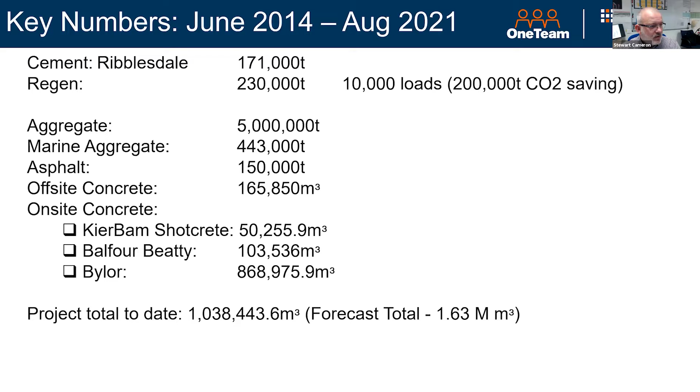Just a little bit of detail on the contractors: Bylor is the main civils construction - they're by far the largest contractor on the project. Kier-BAM is a JV responsible for the site earthworks and infrastructure, and they also constructed the sea defence wall. They're still on site doing multiple little things around site.

There's over 48 warehouses to be built - they're doing some, not all. They're still doing a lot of roads. The permanent infrastructure - I don't think we've actually started any of that yet, so we've got a long way to go with that.

And then Balfour Beatty on their own are doing the marine package. Originally that was Costain's, and unfortunately, for reasons not known to me, Costain's couldn't reach a commercial agreement to finish it, so Balfour Beatty came in and took over. But it's not restricted to that - so far there's been 40 other smaller contractors working on the project, doing different aspects and elements, and I'm sure that will continue to evolve as the project goes on.

So on any given day, we typically have around 15 to 16 different customers that we're delivering to.

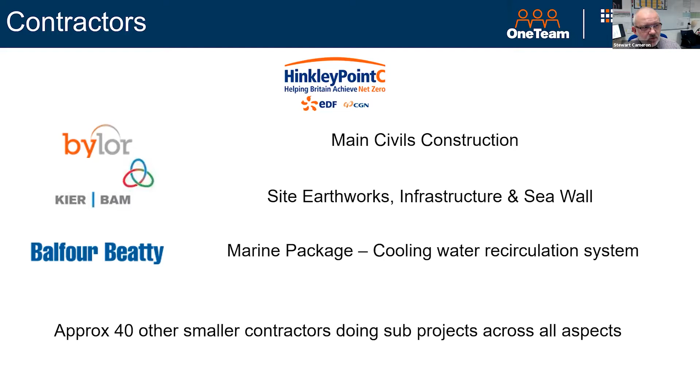Focused on what's left to go. So as I said, just shy of approximately 700,000 cubic, with a current end construction date of May 27.

That doesn't detract from the planned energization of reactor 1, but remember there's 2 reactors here, so reactor 1 will be finished running and powering the grid when we're still finishing elements of the project on site. I've been asked to make sure when I highlight May 27, everybody realizes that's not moving the energization date. It's just that we will not finish the entire project until after that.

Roughly another 100,000 tonnes of asphalt to go, approximately 500,000 tonnes of aggregate left. I suspect that will grow, but that's what we believe at the moment.

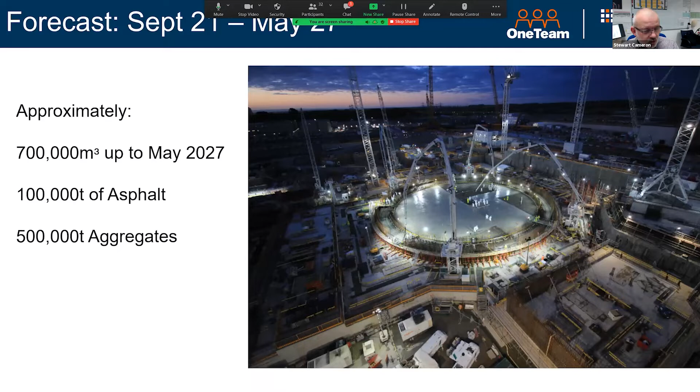So I'm going to give you a short 4-minute long video. Hopefully everybody can hear it okay. Basically, it just shows you the jetty and the concrete batching plants, and you can hopefully understand the scale of Hinkley. For anybody that hasn't been or seen, hopefully it'll help you a little bit. So I'll play it now.

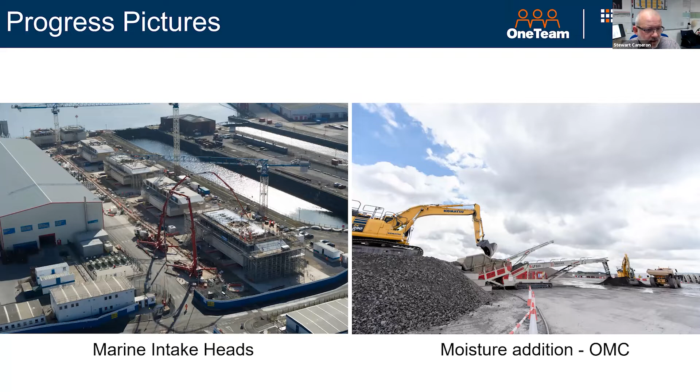Big Carl, which has made loads and loads of press, and rightly so. It's a very unique piece of kit. And for the boys and the toys amongst us, you can't help but think it's tremendously impressive. It's the largest classed as mobile crane in the world, and it has a lifting capacity of 5,000 tons at its shortest level and 400 tons at its full outreach, which I should know the measurement, but I don't. But it obviously is quite a long distance.

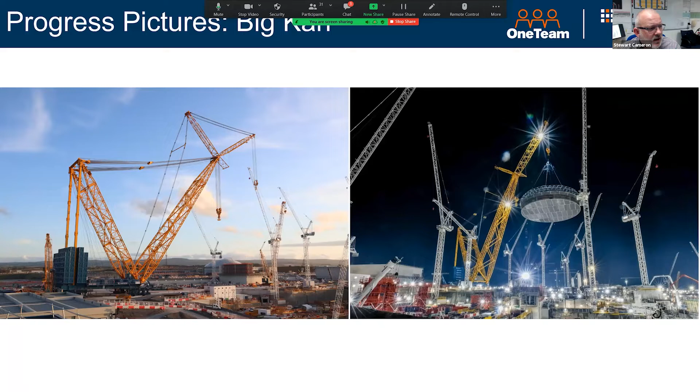It'll remain at Hinkley until nearly the end. Its primary function is the domes, and as you can see on the right, that's it lifting one of the rings into place. It's nearly always done at night, because there's less staff on site at night. They don't want to stop work, but it obviously makes a very pretty picture, especially with the lights in the right place. But it's very, very impressive to see. It's crazy.

Unfortunately, for those who don't understand the life of a TBM, in some projects like Thames Tideway, where you're drilling from point A to point B, then on to point C and D, you can continue using the TBM, which yields better value. When you're drilling something like Hinkley that has no return, you're just going out.

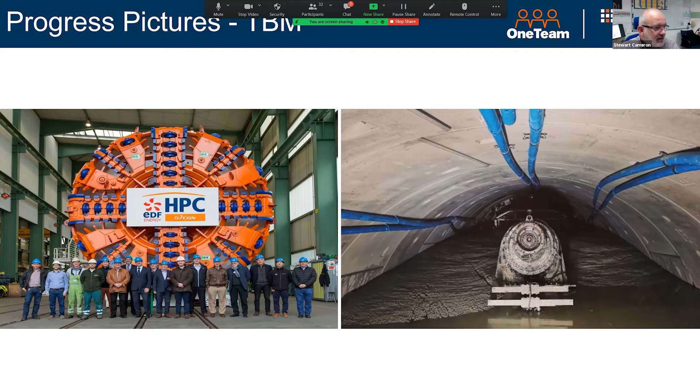All too often people discuss only good things in these type of presentations, and one thing that has been seen very positively with our involvement with EDF is our continued openness and honesty. In a nuclear world, your honesty is spoken by the number of NCRs you have. If you have none or very few, then they call you a liar, and they will do it to your face very blatantly. So we very actively try to be open.

Probably the only real issue we've encountered is these lovely little things most of you will be familiar with: catkins. The effect of catkins on a segment that is not allowed to have anything more than a 3 millimeter blowhole on its surface, which is absolutely minuscule, is quite devastating when you get these lovely little catkins stuck into your material.

I would be selling it short to say we had 3 weeks of hell trying to work out how on earth this happened. Ultimately, the end result is that we move all of our aggregate from our Whatley quarry to Avonmouth by rail. And Network Rail hadn't cleaned the lines in over 20 years.

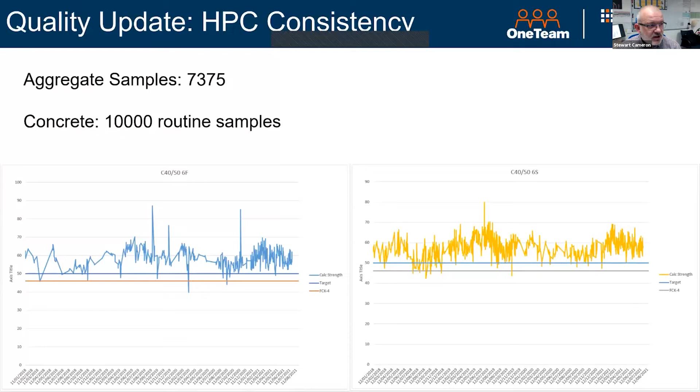Hopefully I haven't rattled too quickly, but that is me drawing to an end now. I think Louise will perhaps open up to some questions, if that's okay.

Stop sharing. Thank you very much, Stewart. That was, as we expected, quite fascinating, mind-boggling numbers, and certainly the pictures of the site at night time were quite atmospheric - very good. Okay, do we have any questions?

You'll need to unmute yourself if you want to speak. Yeah, hi Stewart, I don't mind starting if that's all right with yourself. With the talk about Sizewell potentially coming online in future years, what were the key learnings that you think, going into Sizewell in a decade's time or so, that you take forward from Hinkley?

Scale is obviously - scale and consistency of material is probably the biggest learn that you have to be aware of. And my experience through most of my working life, but certainly through nuclear, is that you leave no stone unturned in your pursuit of making sure everybody understands what you're trying to do, and not get it wrong.

I mean, to the point that I tend to have more quality conversations with train drivers, watching for people or kids standing on bridges throwing bags of rubbish into the wagons. At least he can't stop it, I can't stop it, but he can let us know we need to check the wagons - and you would not believe what we pull out. I know we're not the only people moving aggregate by rail, we nearly all are, but because we have to analyze it so intricately at the other end, the stuff that we uncover and remove is huge.